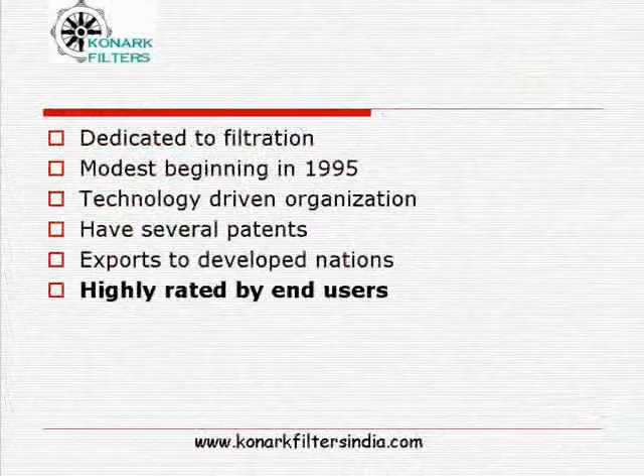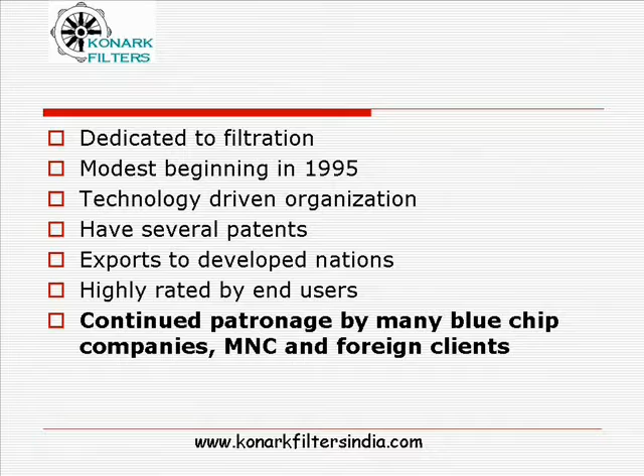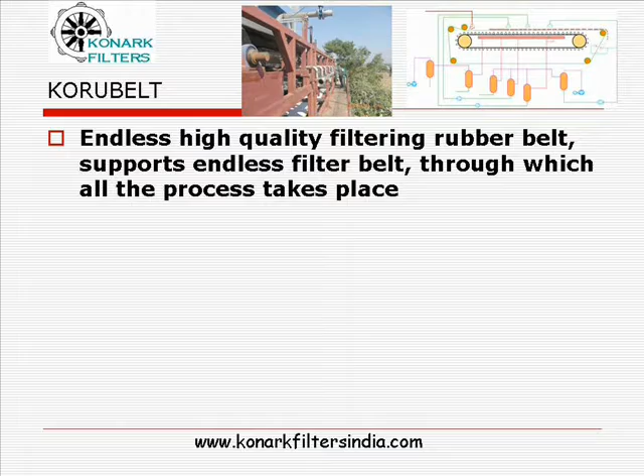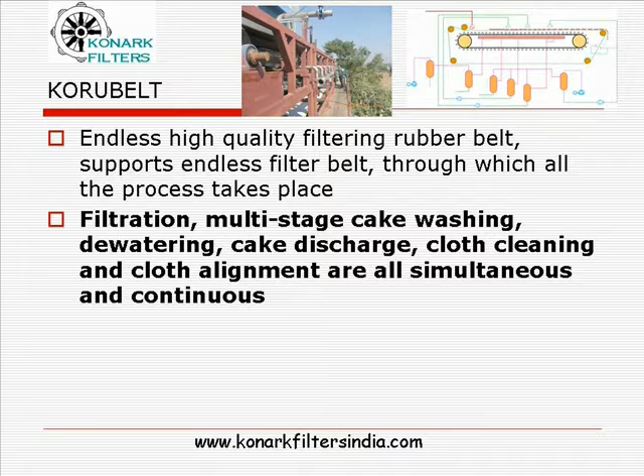Let me take you through vacuum filtration and into the wonderful field of rubber belt vacuum filter, the Korubelt, the ultimate in vacuum belt filter technology. Only vacuum filtration can meet some of the industrial large-scale production needs. Endless, high-quality rubber belt supports the endless filter cloth through which all the process of filtration takes place. Filtration, multi-stage cake washing, dewatering, cake discharge, cloth cleaning and cloth alignment are all simultaneous and continuous.

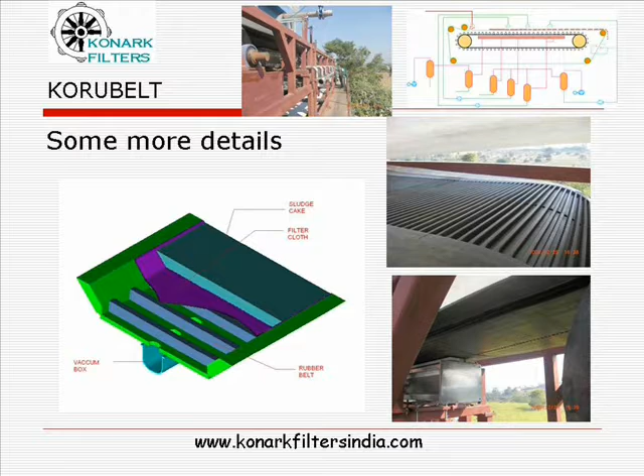Details of the rubber belt are seen here. In the last image, one can see the vacuum box aligned with the discharge ports of the rubber belt very clearly. Korubelt offers high degree of product recovery. Vacuum application is truly continuous in nature. It produces cake of uniform thickness.

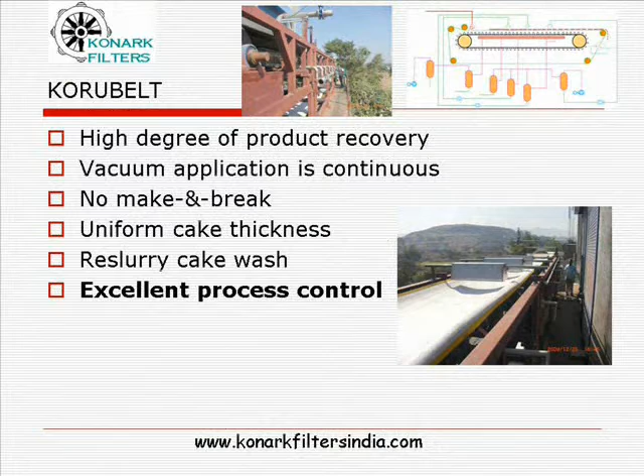Countercurrent re-slurry cake washing gives good results. Overall, Korubelt gives excellent process control without tears. It is the ultimate dream of the process department. It needs least operation and maintenance cost. The entire operation is controlled by state-of-the-art interactive PLC.

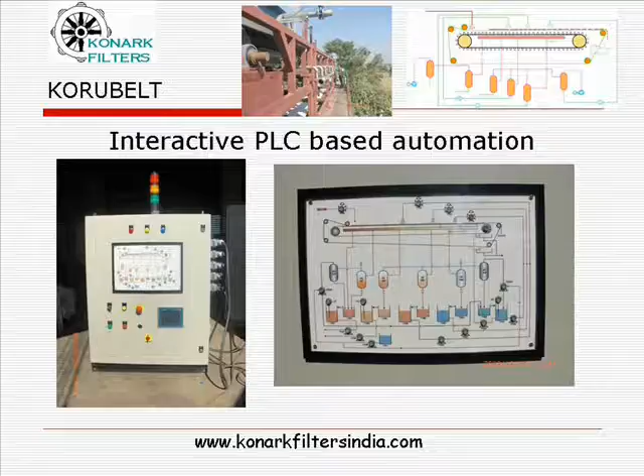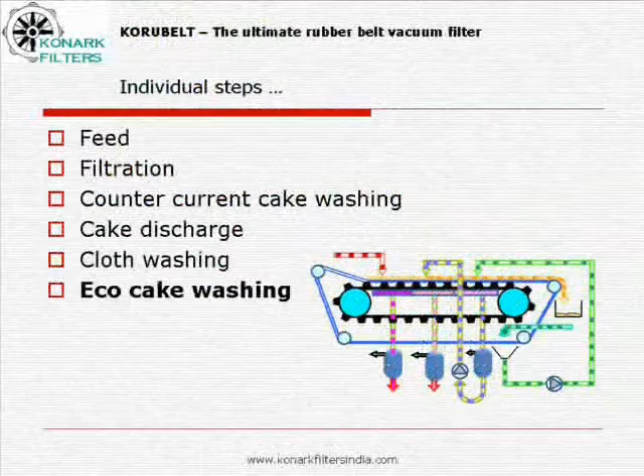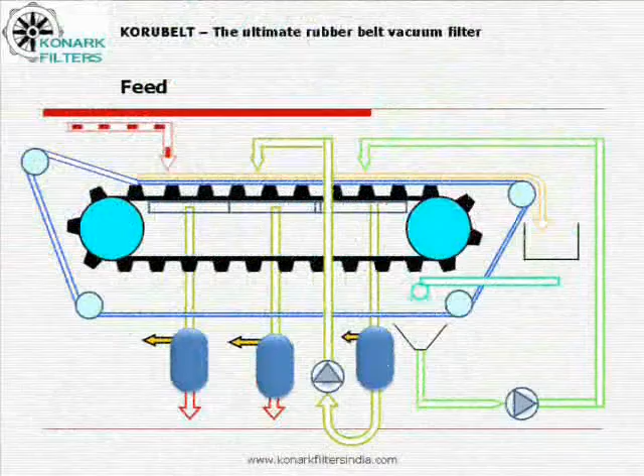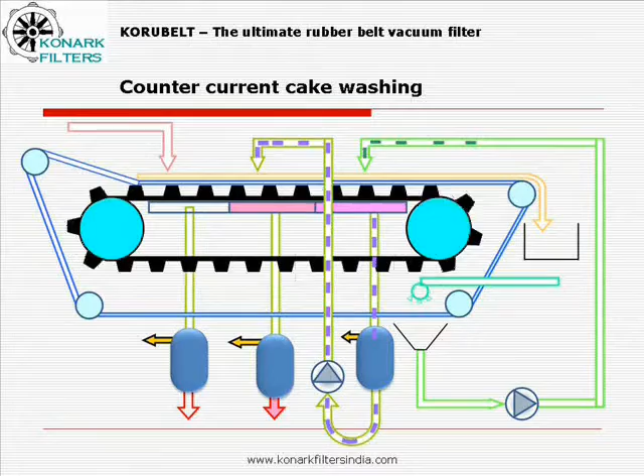Feed, filtration, countercurrent cake washing, cake discharge, cloth washing, and eco cake washing. For more clarity, let us look into them separately. Feed, filtration, countercurrent cake washing, cake discharge, cloth washing,

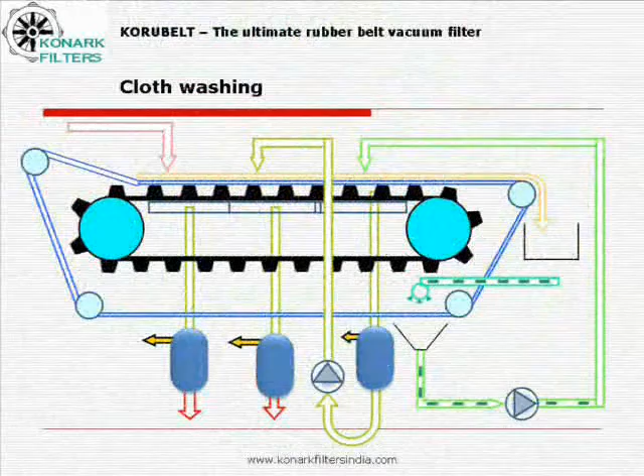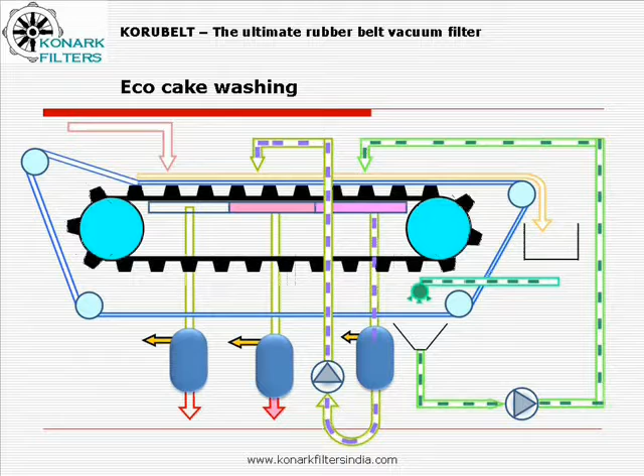and eco cake washing. In eco cake washing, water used for cloth cleaning is diverted for countercurrent cake washing. The traces of solids which could have escaped with cloth wash water are also recovered with this process. Let us take a look at the video clip.

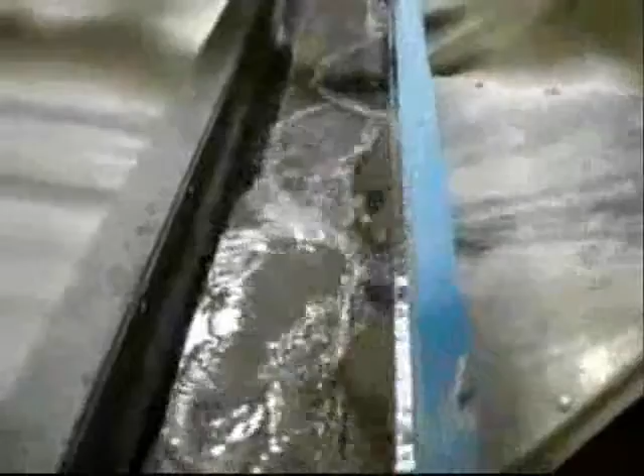Feed, mother liquor filtration, cake washing, wash liquid filtration, cake discharge.